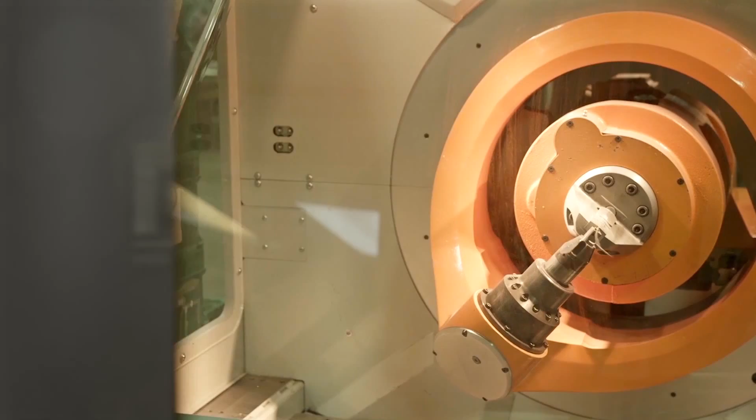For more than 70 years, the Precision Metal Forming Association and its members have subscribed to the very highest standards of excellence. Some have achieved the pinnacle of distinction, and we honor them now with awards of excellence in metal forming. Our first award is the metal forming industry's most prestigious award for designing and engineering excellence, the Higgins-Kieffer Design Award. The award is presented to a manufacturing company that has demonstrated innovation, expertise, and unique product design.

The award was created in 1955 by the Worcester Pressed Steel Company, Worcester, Massachusetts, in memory of its founder, John Woodman Higgins, and former PMA chairman Carter C. Higgins. The award is sponsored by the Quarterly Club, a group of CEOs from leading metal forming companies, in memory of Quarterly Club founder and past PMA chairman Clem Kieffer. The 2015 winner of the Higgins-Kieffer Design Award is Quality Industries, La Vergne, Tennessee.

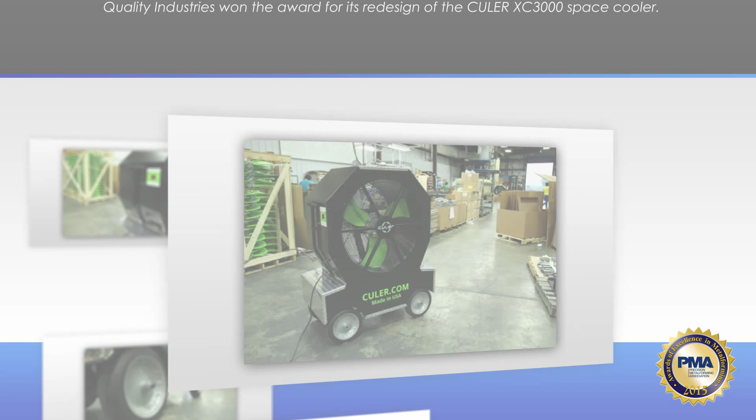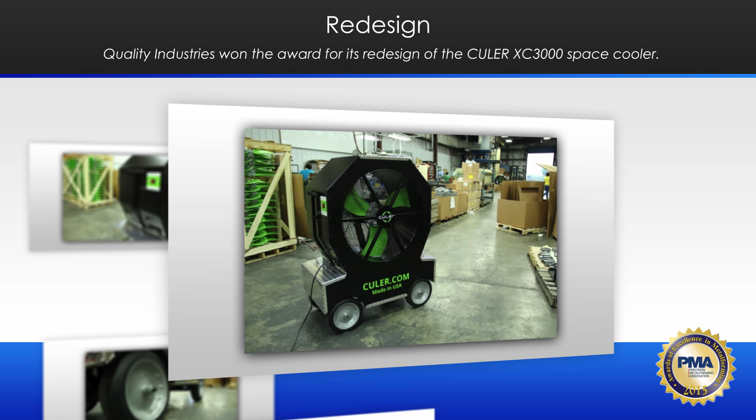Quality Industries won the award for its redesign of the CULER XC3000 space cooler. The space cooler is manufactured with a combination of off-the-shelf components and custom fabricated metal components, including more than 150 separate line items. A high percentage of the fabricated components are manufactured in-house at QI using CNC punch presses, lasers, press brakes, CNC milling machines, arc welding and spot welding machines, and a powder coating system. Assembly takes place on a custom-built line that was designed, fabricated, and installed by QI personnel.

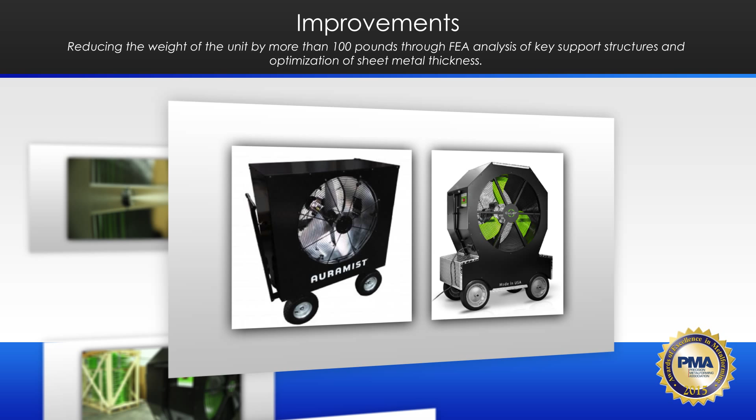Numerous enhancements and additions were made to the new generation CULER XC3000 space cooler, making it more powerful, compact, portable, and durable, and more aesthetically pleasing, while also decreasing per-unit cost. Some of the improvements include reducing the weight of the unit by more than 100 pounds through FEA analysis of key support structures and optimization of sheet metal thickness, lowering the fan body between the wheels, resulting in improved appearance and stability, updating the water tank from an off-the-shelf plastic tank to a punched, formed, welded, and anodized aluminum tank,

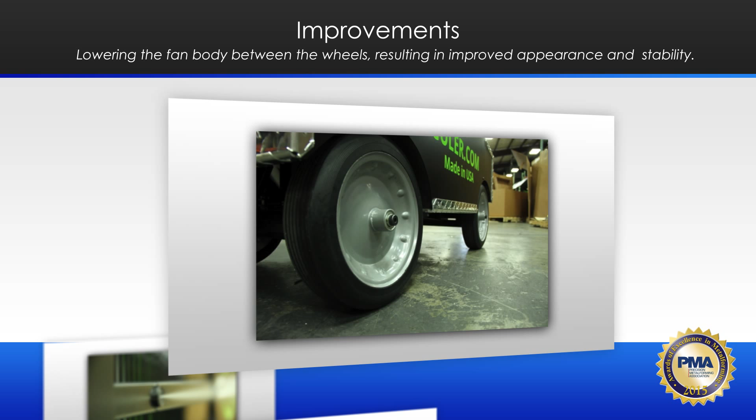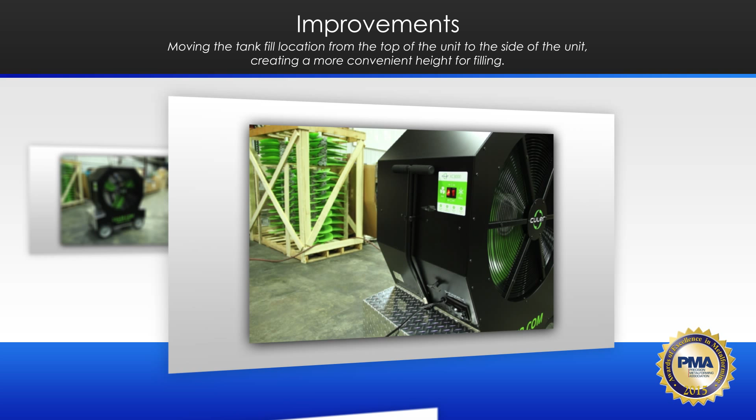moving the tank fill location from the top of the unit to the side of the unit, creating a more convenient height for filling, moving the atomizers into custom-designed brackets to hide unsightly tubing and fittings and prevent moisture from collecting on the front of the grill, and integrating into the system an air tank to provide air to the atomizers during shutdown, eliminating approximately $80 per fan unit.

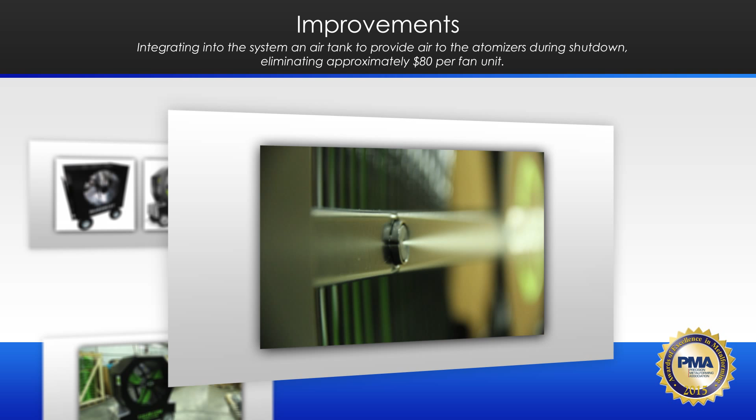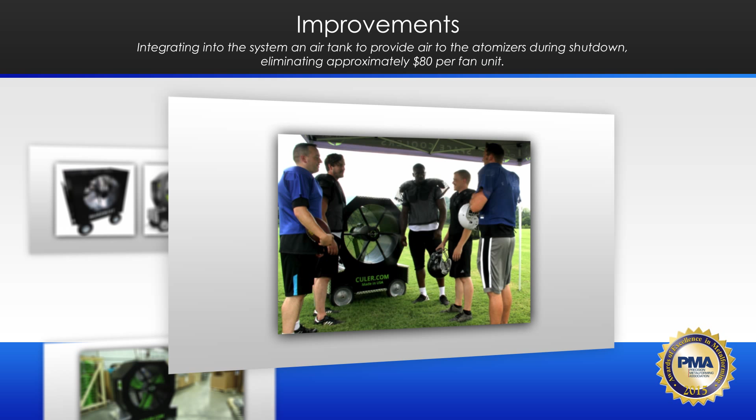As a result of the design changes, year-to-year sales have increased dramatically, with 10 times the number of purchase orders compared to the previous year, and sales are projected to increase 20-fold by the end of 2015. In addition to increased production, cost-saving design improvements have yielded an 18% decrease in total unit cost. The end result is a lower-cost product with a premium look and more features. Congratulations, Quality Industries, for your outstanding work.

The Pitcher Insurance Agency Safety Award, sponsored by Pitcher Insurance Agency, Palatine, Illinois, recognizes an effective and comprehensive safety program or a specific innovative idea in the context of an effective safety program. The 2015 winner of the Pitcher Insurance Agency Safety Award is Matic Manufacturing, Holland, Michigan. Matic won the award for sharing its lessons learned and the safety improvements it made after a fire incident occurred in the company's Holland, Michigan facility.

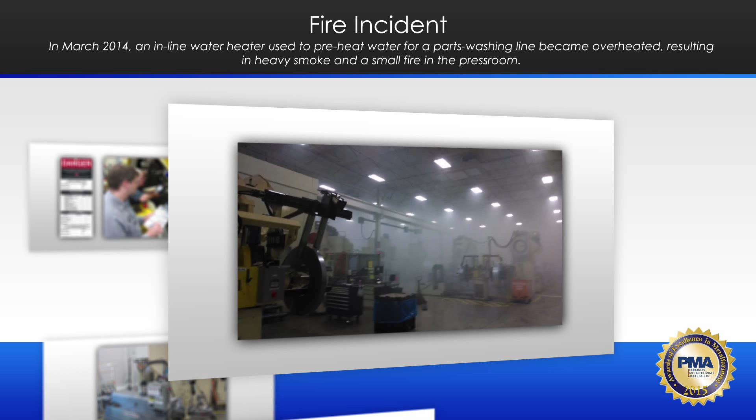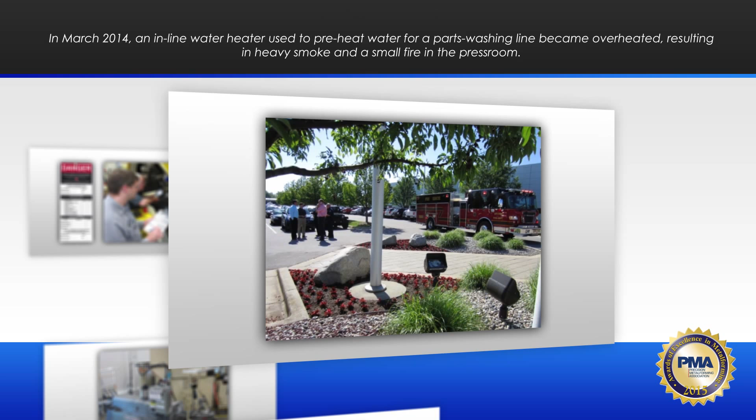In March 2014, an inline water heater used to preheat water for a parts washing line became overheated, resulting in heavy smoke and a small fire in the press room. The Trans-Matic team responded to the emergency, evacuated the building, called the fire department, and put out the fire. All employees were accounted for after reporting to their designated meeting areas. Although there was heavy smoke, there was only minimal damage to the building and no injuries.

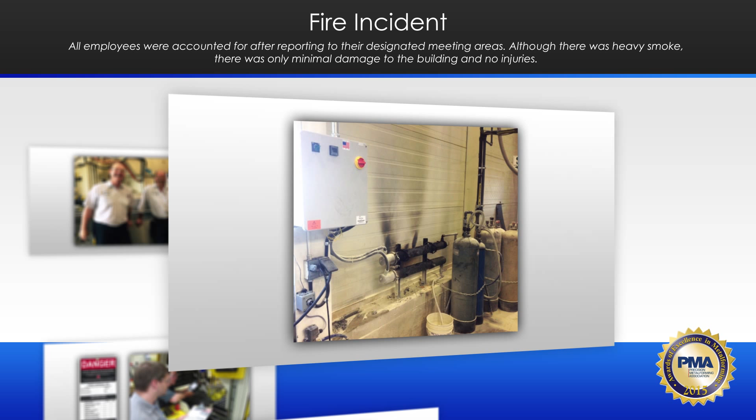However, an investigation revealed that there was the potential for a much more serious event and an opportunity for lessons to be learned and applied. A thorough investigation was conducted to determine the root cause and corrective action. It was discovered that the water heater, with a 72,000 watt heating element, was not designed for a standalone application as installed by Trans-Matic. It was designed to be part of a larger assembly and was not equipped with important safety devices of its own.

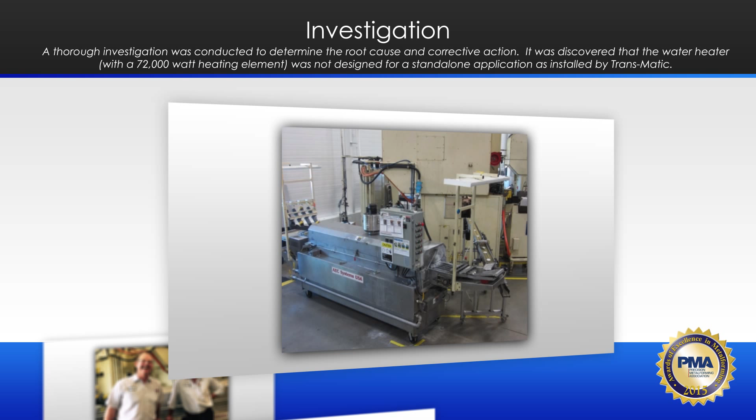Trans-Matic was not aware of this fact and assumed that it was ready to use as purchased. The pre-purchase and installation review did not discover the lack of safety devices. The investigation also found that Trans-Matic did not have the expertise to select and engineer such a system without outside help.

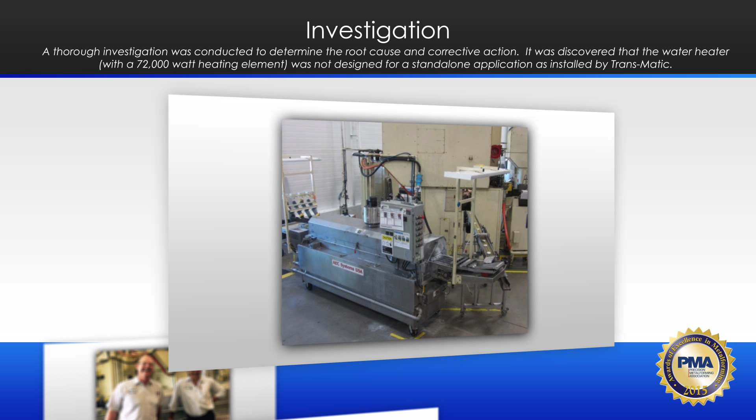As a result, the Trans-Matic team revised its old safety review process to include outside expertise when necessary. This expanded safety review is required for all new machines, equipment, processes, and structures. If the technology is new to Trans-Matic, then outside expertise is mandatory. The safety review process requires the sign-off of a qualified expert for the new design, equipment, or process under review. In addition, a safety approval tag remains affixed to the new machine until installation and final reviews are completed by maintenance, engineering, production, and safety.

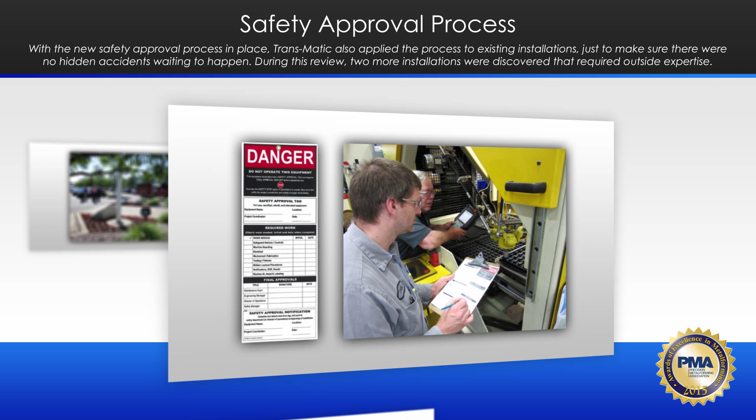With the new safety approval process in place, Trans-Matic also applied the process to existing installations, just to make sure there were no hidden accidents waiting to happen. During this review, 2 more installations were discovered that required outside expertise.

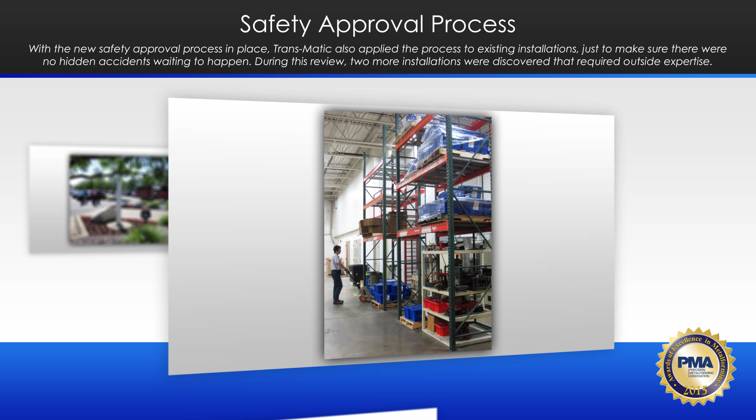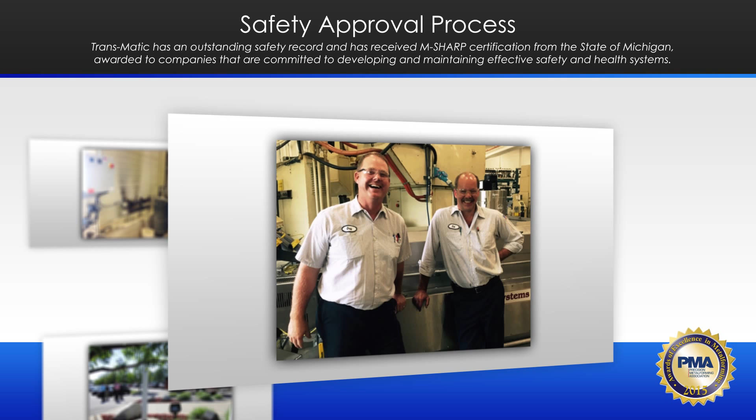The safety review process is fully implemented in Trans-Matic's Michigan and Arizona facilities, with implementation beginning in the Suzhou, China facility later in 2015. Trans-Matic has an outstanding safety record and has received M-SHARP certification from the state of Michigan, awarded to companies that are committed to developing and maintaining effective safety and health systems.

The water heater incident helped Trans-Matic, a company with a strong safety program, to become even stronger. Congratulations, Trans-Matic, on your outstanding safety efforts.

The Link Systems Process Control Award, sponsored by Link Systems in Nashville, Tennessee, promotes the application of electronic analog closed-loop process controls in the metal forming process by recognizing innovative electronic solutions implemented by a North American manufacturing company, which have resulted in significant quality, cost reduction, and productivity improvements.

The winner of the 2015 Link Systems Process Control Award is Zierick Manufacturing Corporation, Mount Kisco, New York. Zierick won the award for its SurfCert Auto Taper for production of surface mount technology components designed and built in-house to reduce the production cycle and minimize cost to its customers.

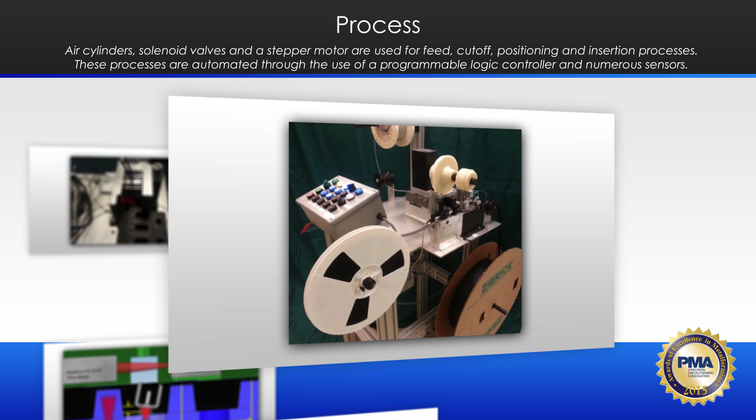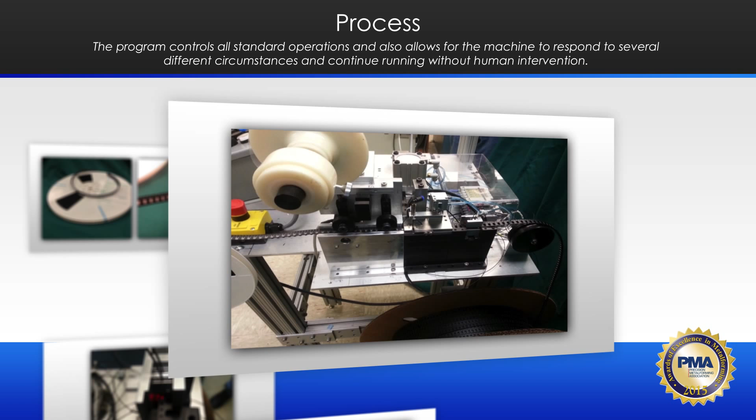Air cylinders, solenoid valves, and a stepper motor are used for feed, cutoff, positioning, and insertion processes. These processes are automated through the use of a programmable logic controller and numerous sensors. The program controls all standard operations and also allows for the machine to respond to several different circumstances and continue running without human intervention. The machine also relies on a stepper drive, 2 power supplies, circuit protection mechanisms, and a push-button control panel that will eventually be replaced by an HMI unit.

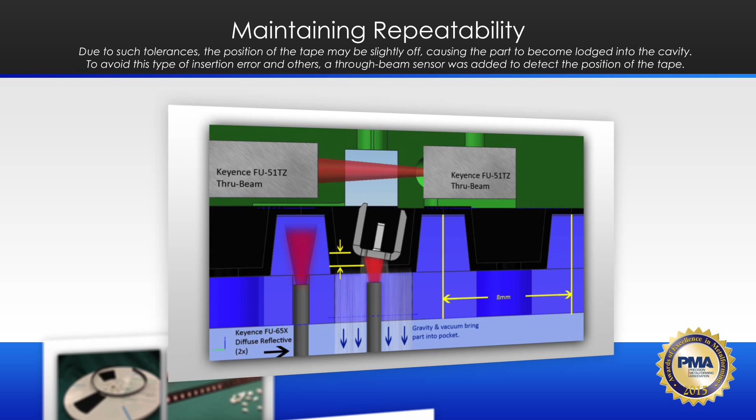Maintaining repeatability with regard to the positioning of the carrier tape was a challenge. The tape is positioned using a stepper motor with a 20-tooth sprocket. The sprocket teeth engage the pilot holes of the carrier tape, similar to how many tape feeders work. The plastic carrier tape is vacuum formed, which dictates rather generous tolerances.

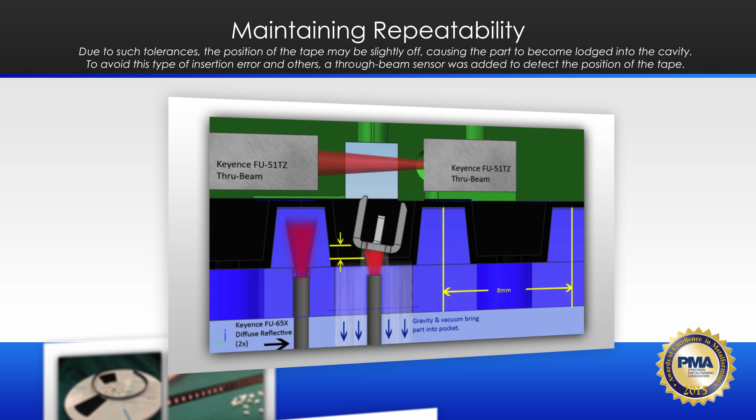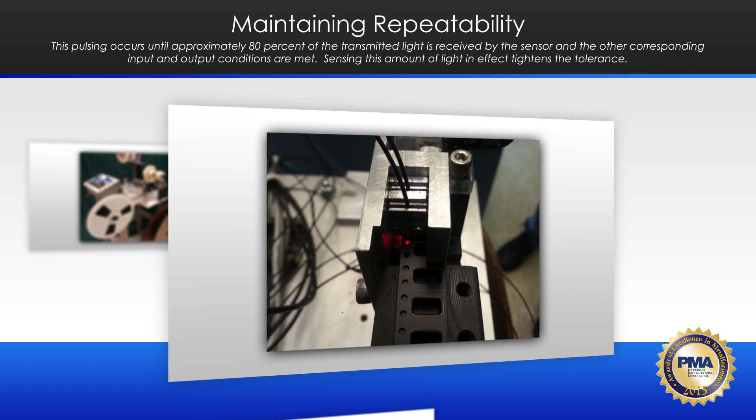Due to such tolerances, the position of the tape may be slightly off, causing the part to become lodged into the cavity. To avoid this type of insertion error and others, a through beam sensor was added to detect the position of the tape. The through beam is transmitted through a single pilot hole in the tape, while the PLC program sends pulse signals through a stepper drive to a stepper motor. The pulse signals cause the stepper motor to rotate in microstep increments of 1/20,000th of a rotation.

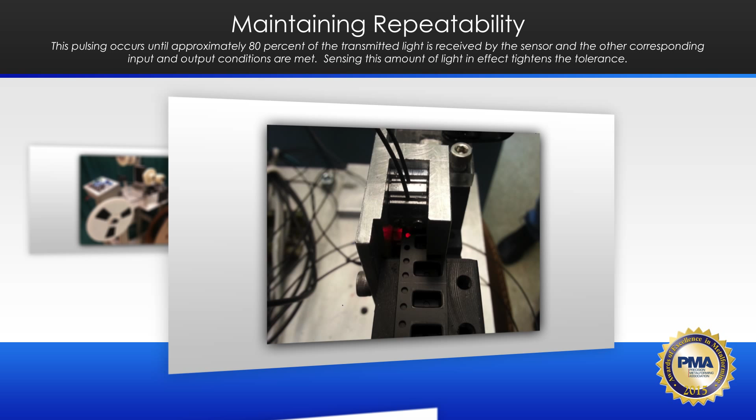This pulsing occurs until approximately 80% of the transmitted light is received by the sensor and the other corresponding input and output conditions are met. Sensing this amount of light in effect tightens the tolerance. Use of the PLC also reduces setup and reload time by automatically leading in and trailing out the reel of tape with the correct number of unpopulated cavities as required for the customer's pick and place machines.

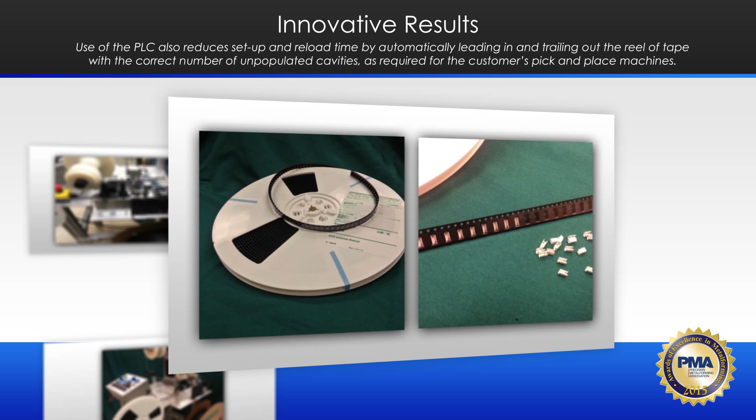The machine can detect when a part fails to be fully inserted into the cavity of the tape. If this situation arises, the machine will take a corrective action by actuating an insertion plunger above the cavity, which assists the part down into the bottom of the cavity.

Congratulations, Zierick Manufacturing, on your innovative electronic solution.

The Pridgeon and Clay Excellence in Quality Award is sponsored by Pridgeon and Clay, Grand Rapids, Michigan. This award recognizes outstanding achievement in the development and implementation of a company-wide quality system that effectively uses continuous improvement.

The winner of the 2015 Pridgeon and Clay Excellence in Quality Award is Kryton Engineered Metals, Cedar Falls, Iowa. Kryton's outstanding quality system includes executive management commitment, management review, software featuring paperless shop floor data entry and real-time interaction, a dedication to team member training and education, customer partnerships to reduce non-conformance, and preventative action.

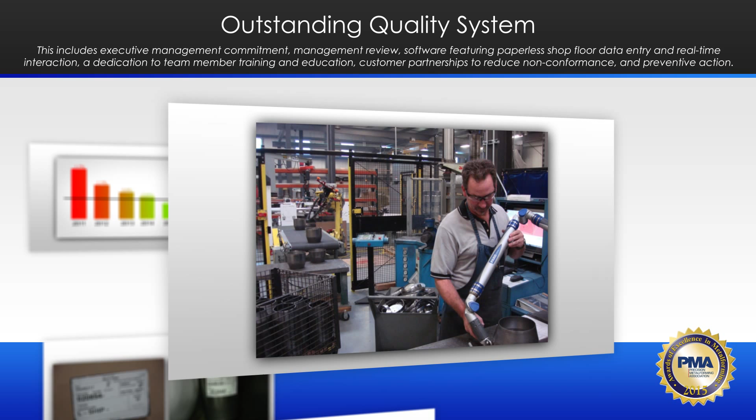Crichton Management reviews all activities relevant to ISO certification requirements. Quality staff presents to management a monthly operations report that includes detailed information and charts on all aspects of the operations, including customer on-time delivery, PPM ratings, shipments, scrap, and much more.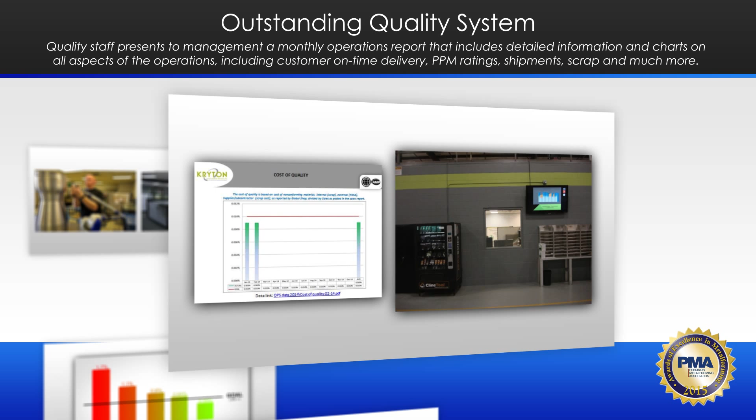This report is distributed to all Kryton employees via email, and pertinent charts are shared through electronic message boards throughout the facility. Kryton also uses ERP production software featuring paperless shop data entry and real-time interaction. At the conclusion of each operation, the system prints a move ticket that shows the step completed and the next step required, providing accurate identification for all products in process.

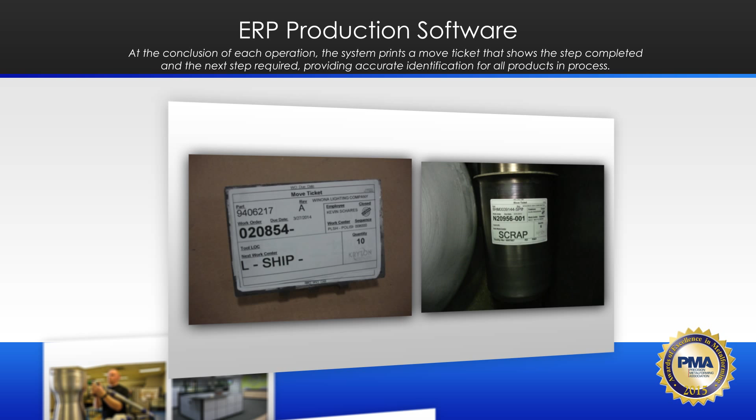A scrap tag also is printed immediately on non-conformance, so the material is identified and quarantined. Scrap is reconciled daily through the ERP software. This system also allows for a cause and corrective action, or internal 8D, to be issued if needed. Scrap is calculated through the exact operation point where the part was scrapped, providing accurate cost data. As a result, Kryton has realized a dramatic scrap reduction.

Kryton believes in continuous learning for its team members, offering an education tuition reimbursement program for employees, as well as employee training on-site and off-site to keep employees up to date on job knowledge. The company has 5 team members who are bronze certified in lean manufacturing, 1 team member who is a Six Sigma certified blue belt, and another who is Six Sigma green belt certified.

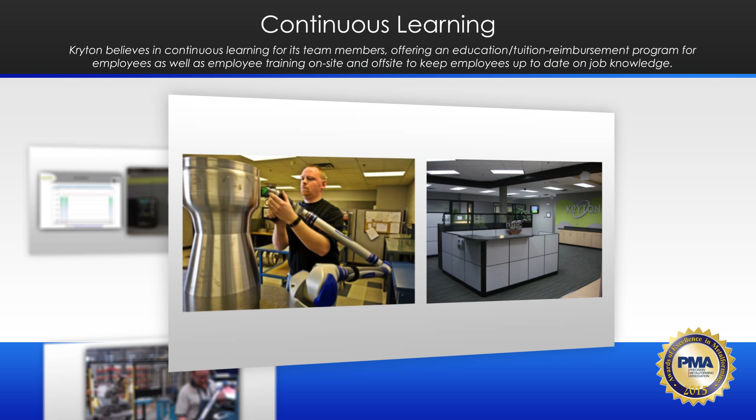Kryton is a strategic partner with its largest customer, and many others, in an effort to reduce non-conformance. This typically includes quarterly interface meetings in addition to training and meetings at corporate offices.

Congratulations, Kryton Engineered Metals, on achieving an outstanding quality system.

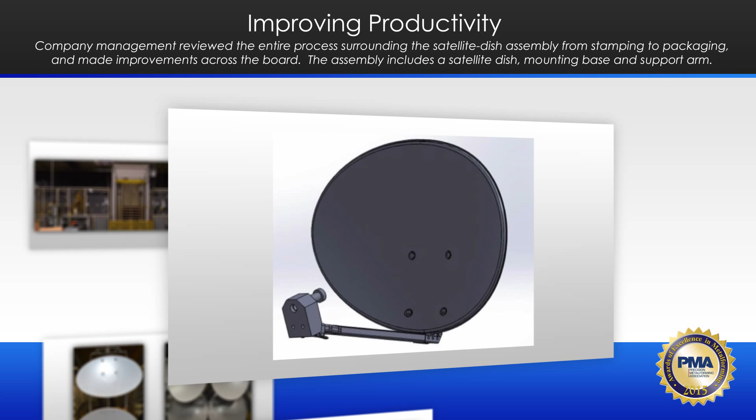Highlands Diversified Services won the award for productivity improvements related to a satellite dish assembly for a telecommunications company. Company management reviewed the entire process surrounding the satellite dish assembly, from stamping to packaging, and made improvements across the board. The assembly includes a satellite dish, mounting base, and support arm.

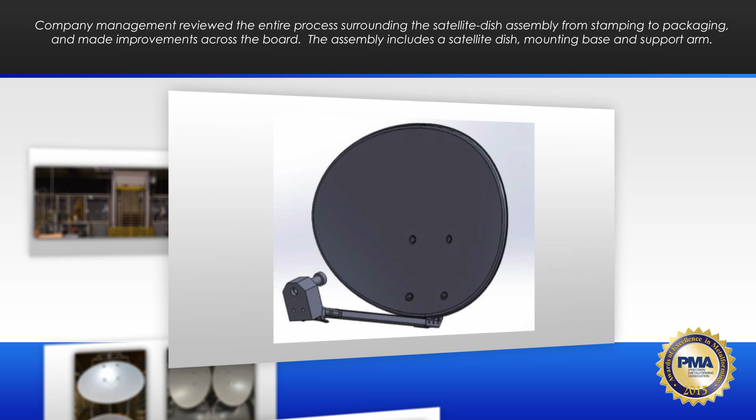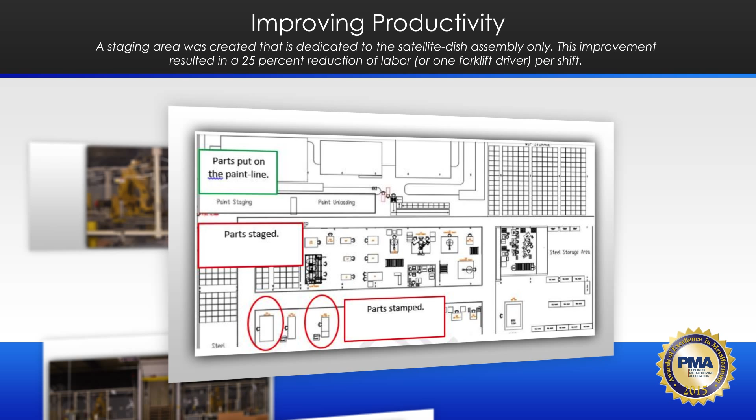A staging area was created that is dedicated to the satellite dish assembly only. It sits near the paint line, thus reducing the time spent by the forklift driver handling associated totes. This staging method frees press personnel from being dependent on a forklift to remove their full totes. It also frees paint line personnel from being dependent on a forklift to bring them parts. This improvement resulted in a 25% reduction of labor, or one forklift driver per shift.

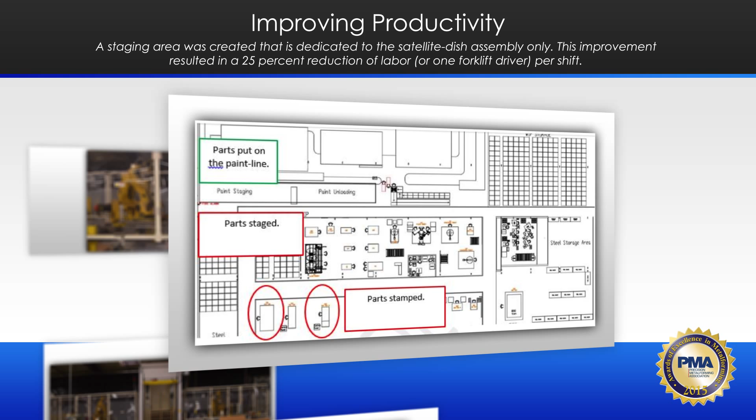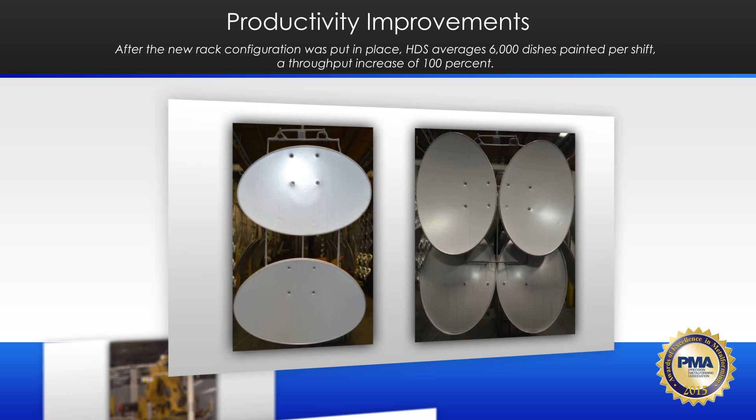Stamped satellite dishes previously were placed on paint racks that only held 2 dishes, but HDS redesigned the rack to hold 4 dishes. After a new rack configuration was put in place, HDS averages 6,000 dishes painted per shift, a throughput increase of 100%.

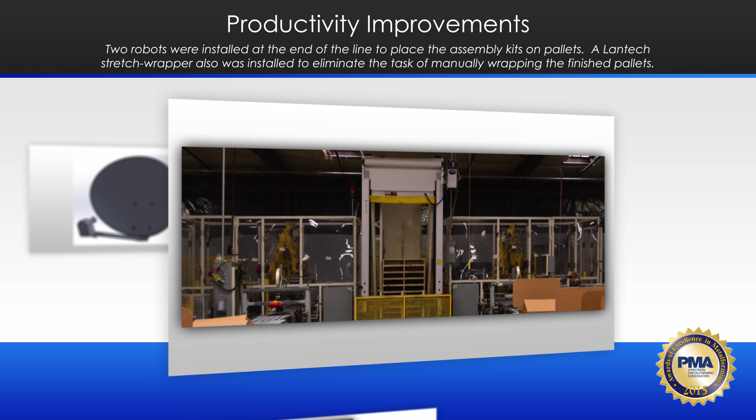Before improvements were put in place, all of the components of the satellite dish assembly kit were packaged on an entirely manual packaging line. Two robots were installed at the end of the line to place the assembly kits on pallets. A Lantech stretch wrapper was also installed to eliminate the task of manually wrapping the finished pallets.

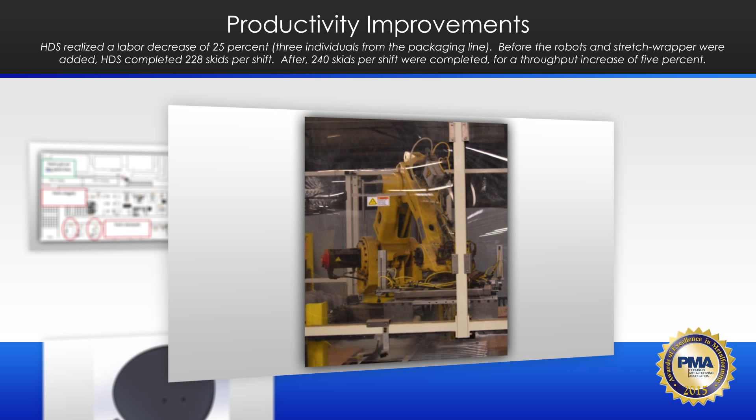After the improvements to the packaging process, HDS realized a labor decrease of 25%, or 3 individuals from the packaging line. Additionally, before the robots and stretch wrapper were added, HDS completed 228 skids per shift. After, 240 skids per shift were completed, for a throughput increase of 5%.

Congratulations, Highlands Diversified Services, on your remarkable achievements.

The Ulbrich Award for Competitive Excellence in Product Development is sponsored by Ulbrich Stainless Steels and Special Metals, North Haven, Connecticut. The award recognizes a metal forming company that develops and manufactures a product that best utilizes metal in place of a competitive material, or that develops a product using flat-rolled material at a significant cost reduction to customers on a product that was previously manufactured using more costly manufacturing processes, such as machining, tubing, metal injection molding, or casting.

The winner of the 2015 Ulbrich Award for Competitive Excellence in Product Development is Trans-Matic Manufacturing Company, Holland, Michigan.

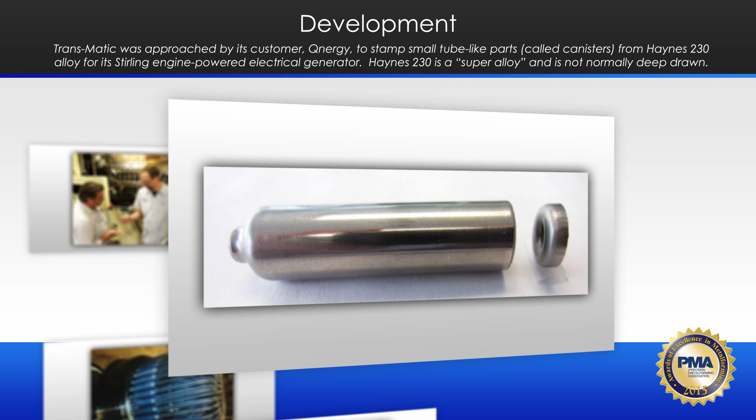Trans-Matic was approached by its customer, Qnergy, to stamp small tube-like parts called canisters from Haynes 230 alloy for its Stirling engine-powered electrical generator. Haynes 230 is a super alloy and is not normally deep-drawn. Trans-Matic's engineers first ran several computer forming simulations, then, working together with experienced toolmakers, developed a feasible and then optimal forming methodology for the parts.

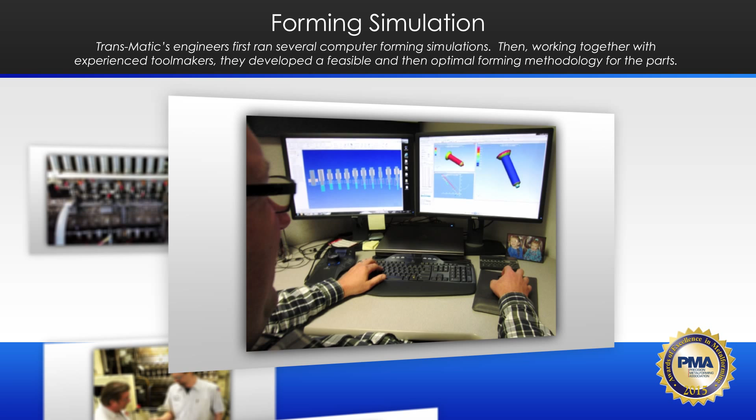The original canister design had 3 parts, a tube and 2 end caps. The end caps were machined from solid Haynes bar stock, and then each cap was welded to the tube. The 3-piece, 2-weld design was expensive, considering that there were 80 of these canister assemblies per Stirling engine, and it was difficult to achieve dimensional and durability requirements.

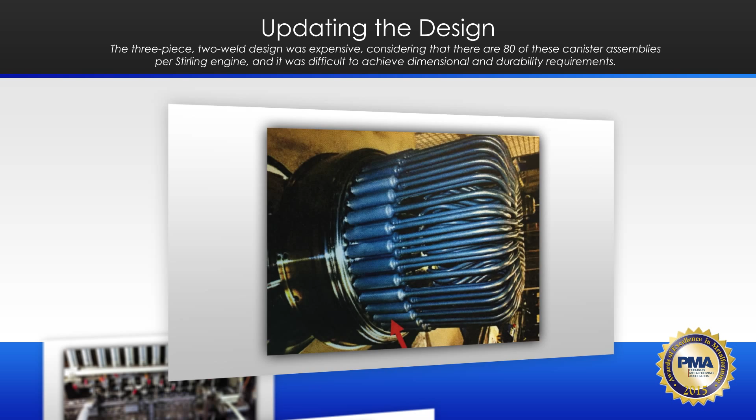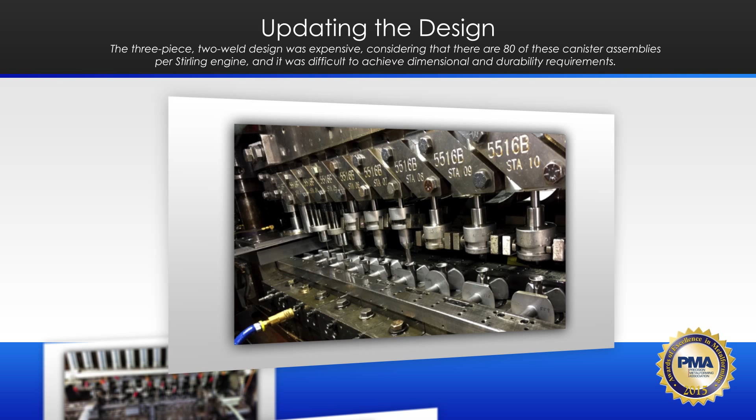Working with Qnergy, the design was changed to 2 deep-drawn stampings using the same Haynes 230 material. The Trans-Matic parts would be stamped to completion in the press, and then joined with 1 weld at the customer.

Initially, high-strength carbide tooling was used to form the longer filter canister, but the carbide tended to damage the part surface and open the grain structure.

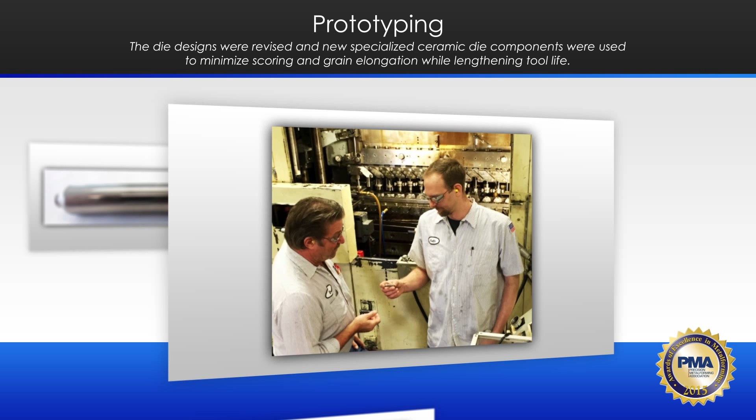The Haynes material was also very abrasive on the tools. The die designs were revised, and new specialized ceramic die components were used to minimize scoring and grain elongation while lengthening tool life. With the shorter cold transition canister, punch wear was not a problem for the low-volume prototype runs.

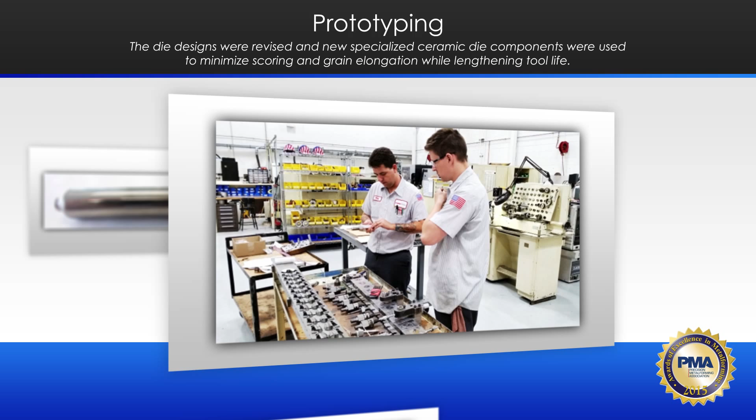But once the production runs began, punch tooling wore significantly after only a few thousand parts. Special lubricants and coatings were investigated, and the solution was to treat the M4 punches with a coating specifically designed for abrasive materials. The filter canister was produced in a 16-station tool using a Baird 75-ton transfer press.

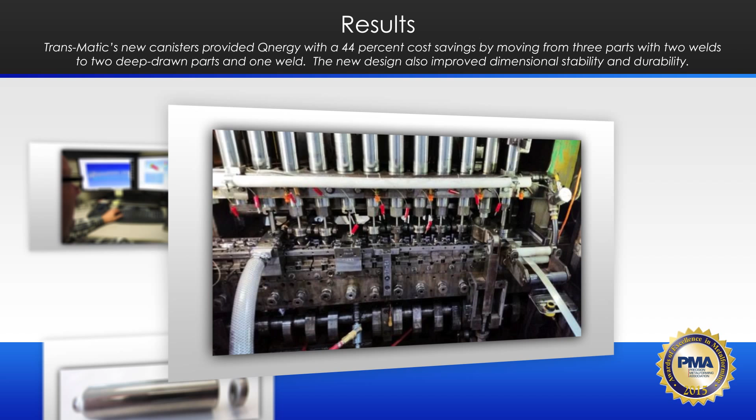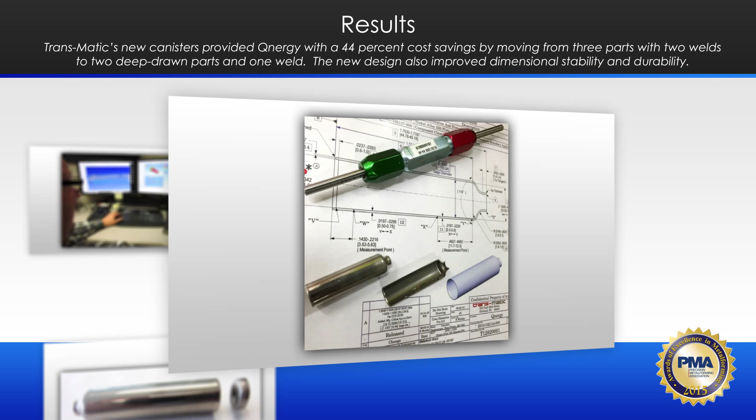The cold transition canister was manufactured in a 12-station tool running in a Waterbury 30-ton transfer press. Trans-Matic's new canisters provided Qnergy with a 44% cost savings by moving from 3 parts with 2 welds to 2 deep-drawn parts with 1 weld. The new design also improved dimensional stability and durability.

Congratulations, Trans-Matic, on a job well done.

The Clips and Clamps Industries Educational Institution Award is sponsored by Clips and Clamps Industries, Plymouth, Michigan. It recognizes a public or private educational institution that provides exemplary training and education services to companies in the metal forming industry. The winner of the 2015 Clips and Clamps Industries Educational Institution Award is Schoolcraft College, Livonia, Michigan.

The school won the award for its outstanding manufacturing programs designed for students seeking 21st century skills based on today's manufacturing environment. Educational programs at the school covered middle school and college students and industry workers.

Schoolcraft College has a well-established industry advisory committee that has been active for more than 15 years, with a dozen companies participating at its most recent meeting.

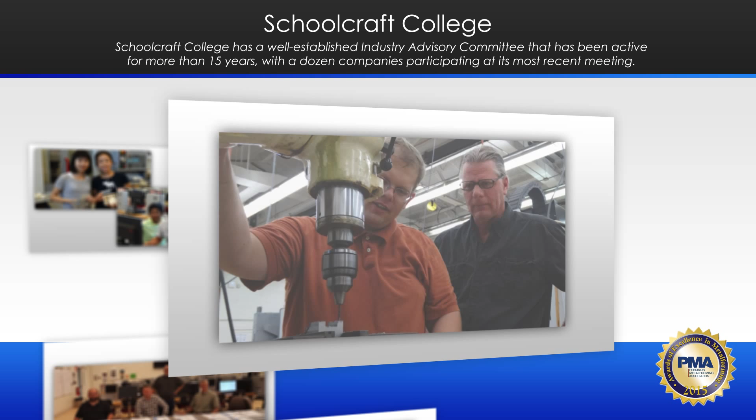The school acts on the committee's recommendations and, as a result, has developed and implemented a GD&T course, working to add NIMS accreditation into the programs, helped companies set up apprenticeship programs, and developed curriculum for new internship courses in advanced manufacturing and welding.

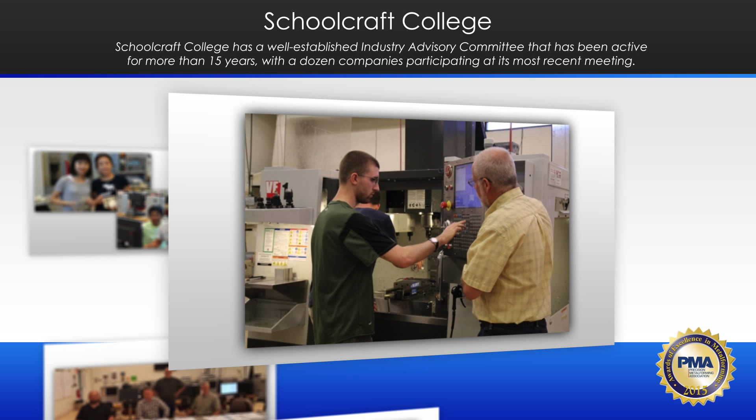The college, along with both Livonia Chamber of Commerce and Plymouth Chamber of Commerce, work directly with local industries through the Livonia Industrial Council and the Plymouth Manufacturing Council, a partnership of educators, businesses, and policymakers focused on growing a skilled and high-tech workforce in the region.

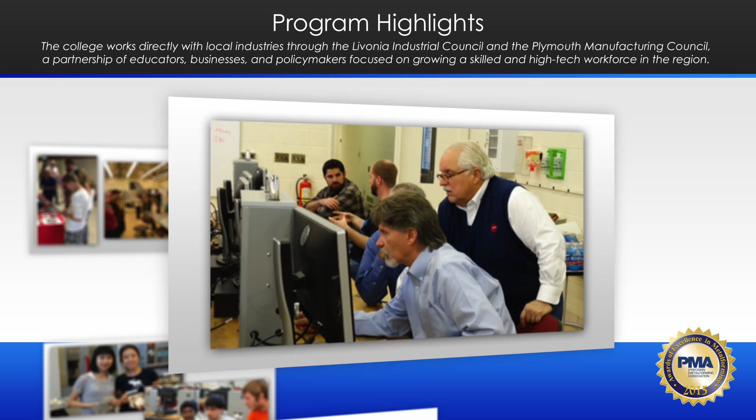In addition, local businesses have donated time and machines to the school's manufacturing department, showing the trust and faith it has earned from local businesses.

Under the leadership of Gene Keyes, head of the Advanced Manufacturing Department, Schoolcraft College has aggressively tackled the challenge for developing new skilled metal workers by updating curriculum and pursuing NIMS accreditation.

Beginning with the 2014-2015 school year, students were able to acquire NIMS certification from the college's advanced manufacturing programs. They complete practical tests in the Advanced Manufacturing Lab and take theory tests at the school's testing center.

In an effort to expand NIMS credentials in Michigan, Schoolcraft College hosted a week-long workshop for manufacturing instructors to help them better understand NIMS credentials. A total of 73 credentials were earned, with 30 of those earned by Schoolcraft faculty and students.

Schoolcraft College actively reaches out to the community, introducing parents and students to the world of manufacturing and machining. One way the school does this is through the college's Kids on Campus program, Manufacturing High Adventures, which is attended by more than 60 students from middle school to high school every summer.

The department also works with local K-12 teachers and administrators to develop a career path from middle school to college and then on to jobs.

The school also recently hosted its second annual open house in the Advanced Manufacturing Lab, allowing more than 200 students and parents to tour the lab and campus.